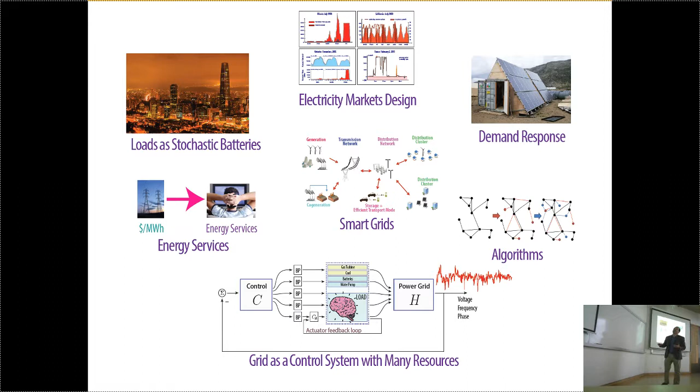I'll give a brief introduction into some of the questions I'd like to speak about today, then a brief overview of robust optimization. There are 107 slides, but I'll probably use like 20, so don't worry—you won't be here until 3 p.m. I'll probably talk until around 12:20 or so.

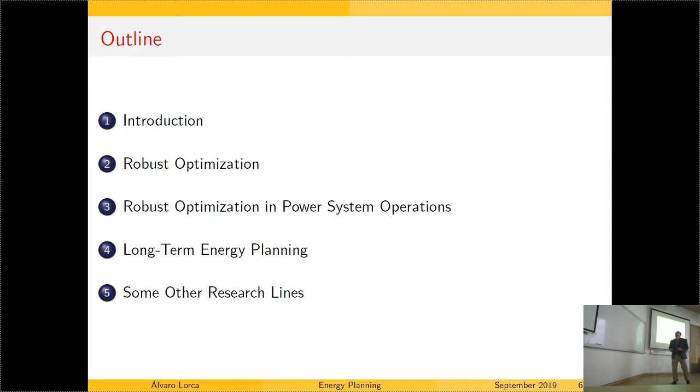Then a little bit on robust optimization in power system operations, energy planning, and if we have time, I'll touch on some other things I'm doing on optimization and energy-related aspects.

The main difficult thing was probably generator contingency—some generator telling you in 10 minutes it'll be out of the system because of some problem, or it disconnects right now because of some issue. Right now we had Argentina having a blackout last year because of some issues in some transmission lines, and that's really hard to manage today as well.

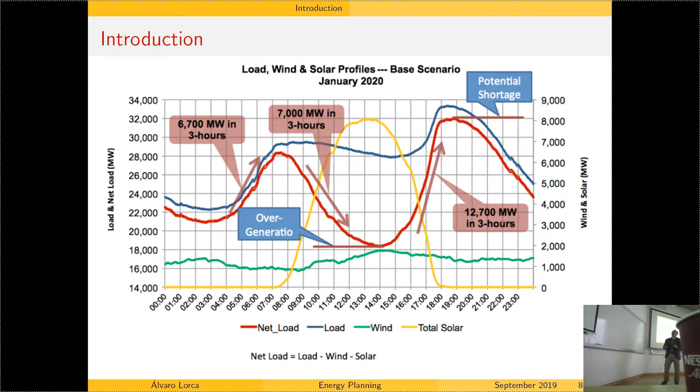But what's making things a lot harder is solar power and wind power. Solar isn't that variable—if you have huge clouds, you might get some strange spikes up or down. But wind is very variable. If you start increasing this signal, it becomes very, very variable, so you're adding a lot more variability into the system. How do we handle this, and how do we change our operational and planning means to have reliable and sustainable energy systems?

That's the question—so I'll be talking about optimization under uncertainty. First of all, you cannot rely only on forecasts. You need to understand how uncertainty somehow merges with your decisions, and we need efficient computational methods to handle high-dimensional uncertainty.

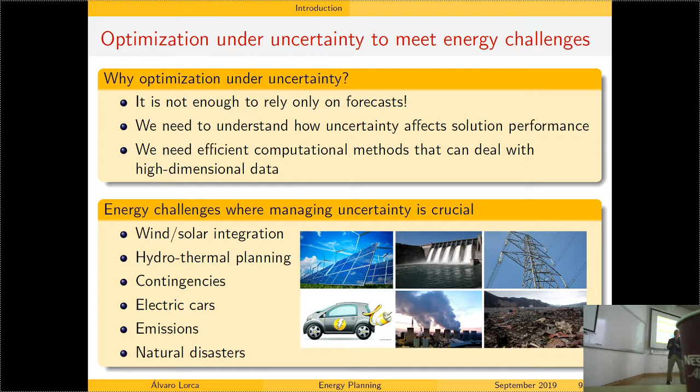So that's some of the challenges, and here are some of the critical points. Okay, I'll just keep to this part.

So what is robust optimization? For those of you that don't know it—I know most of you might know what this is—we'll go over it very quickly.

So what is a typical optimization problem? I have some function that I want to minimize, some constraints. Now the question becomes, what if I have some random parameters, some d vector? This d vector will affect both my constraints and my objective.

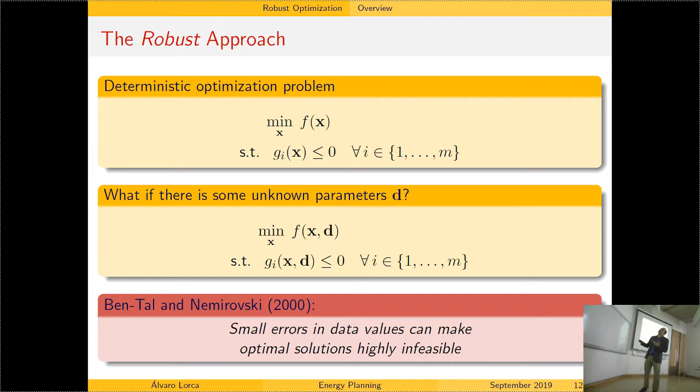Ben-Tal and Nemirovski, almost 20 years ago, told us in this seminal paper that small errors in data values can make optimal solutions—optimal assuming you knew some forecast—highly infeasible, or very far from the feasible space, if this D ended up being something different than what you expected. So how do we find solutions that are immunized against these different possible Ds? That's the main question robust optimization asks.

So we have a very simple example here: two cities, one transmission line, generator A, generator B, demand A, demand B. This generator is cheap, this generator is expensive. I want to supply most of this demand using generator A, but this line has some congestion. This is a very simplified version of the model.

You minimize 10 PA plus 20 PB, with some constraints over both generators and a constraint over the transmission line. Let's say you want at least as much power generated as demand. If we have 100 megawatts of demand here and 100 megawatts of demand here, the optimal solution is producing 130 here and 70 here. It makes sense because you're producing as much as you can here, given that you satisfy the transmission line constraint.

But what if I tell you dA and dB are really in some interval, and that's all you know? dA will be between 80 and 120 megawatts, dB between 80 and 120 megawatts. What would be a good solution now? If I give you this solution, it quickly becomes infeasible if dB becomes 101, for example, or if dA becomes 101.

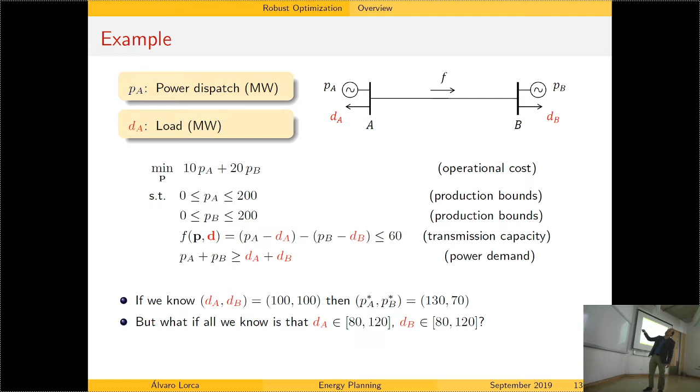So, for example, this other solution—generating 120 here and 120 here—is what we call a robust solution. This will be a feasible solution for any dA in this interval and dB in this interval. You can check all the different alternatives, and you see this solution is feasible under all those circumstances, whereas the original solution quickly becomes infeasible if you vary these numbers a little from 100. This one is more stable in a way.

So the question is, first, let's go back to this huge system. The power system is a really complicated machine—there's a lot of uncertainty, and I want reliable control for it. So how can I find a reliable way to control this large power system? That's the main question.

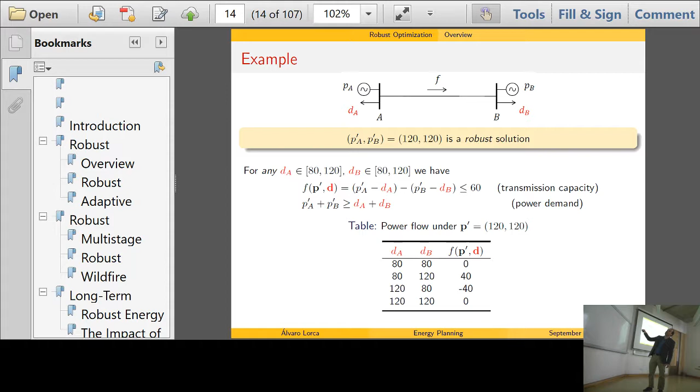Sure, it's much more expensive, but you can check—for example, then you raise the question: what would be the cheapest solution that is reliable under any possible circumstance? At least that one is. Then again, you can generate 140 at each place to make sure you have enough energy, but that's more expensive than this one. So yes, there's a trade-off between reliability and economic effectiveness in a way.

But then you can ask, in a systematic way: what is the best economic solution that satisfies certain reliability criteria? So the traditional, or simplest, robust optimization problem in general is this one: you want to choose some decision such that the worst-case cost is minimized under some D in this uncertainty set, which we call D. These constraints should be feasible for any D in D.

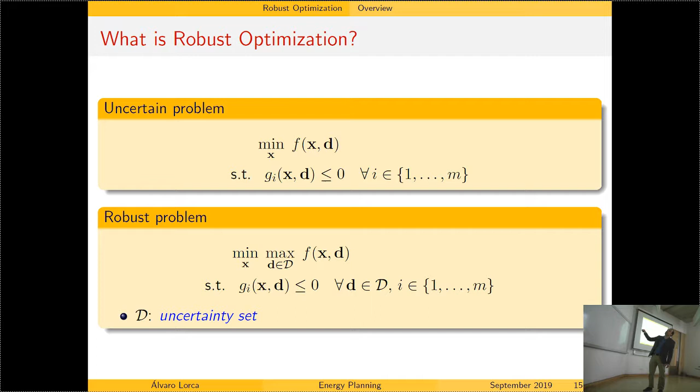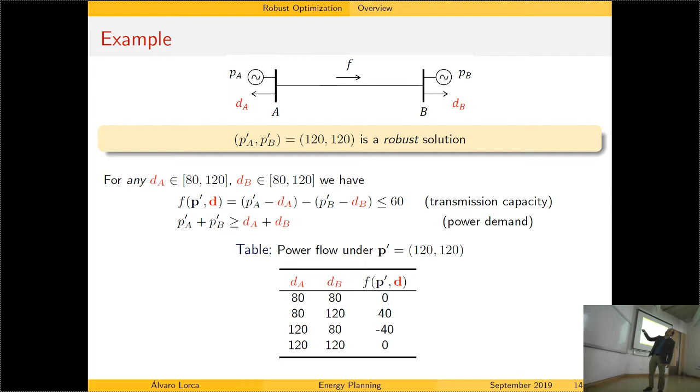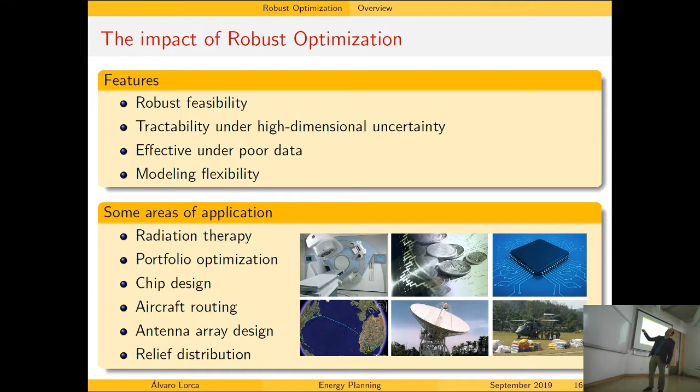Now this D set doesn't have to be a box or two intervals like this one. It becomes a huge question if you have, say, 1,000-dimensional uncertainty—1,000 Ds—what would be a reasonable set? Probably a box or interval for each DI is not a good idea. There's a lot of reasons for doing robust optimization, and you find it studied and employed in many different areas. So I just want to touch on one key methodological idea—that's exactly the question.

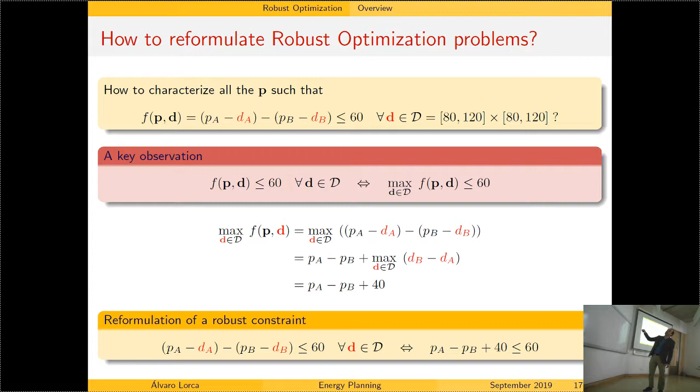How do we find the best solution such that this transmission constraint I showed you before holds? You can write this general robust constraint exactly as this: in the worst case for this vector D, I want this to be less than or equal to some capacity of this line or whatever system it is. In this case, it becomes simple to analyze, but more generally, what you're studying is basically this expression here.

If you have some linear relationship between some function of x and your uncertainty D, and your constraint is that you want this c of x transpose D to be less than or equal to some h, for all D in D, this is equivalent to this being less than or equal to h, and by duality, this expression we have here, and we have some very general expression here written using cones. By duality, we can write this in this way, and that means that our original constraint can be written as this equivalent system of equations using the dual cone of this cone here.

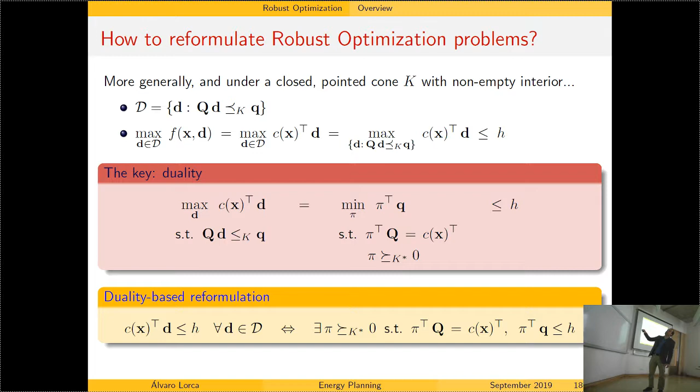So in the linear case, you can just get rid of this k, just have greater or equal to here, but then you can also have SOCP or SDP here. So this is the duality-based reformulation of robust optimization constraints, of robust constraints. We can do a lot of different things.

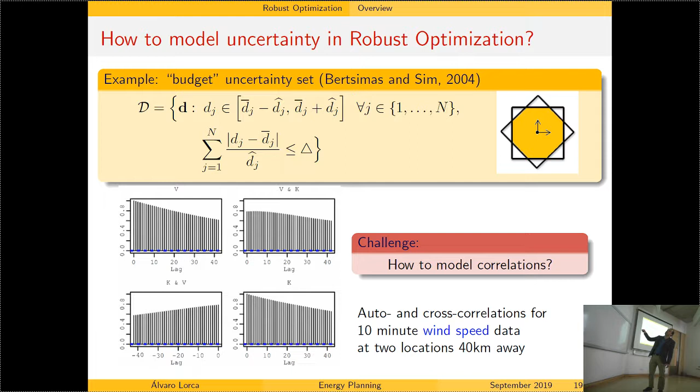The question is, how do we build this set? We can actually also model correlations into these sets. I'll show you in a bit how. Another important aspect is when I have adaptive decisions.

What if I have to make this X decision now, and then I'll observe these Ds that appear over time, D1, D2, and every time I observe these Ds, every time I make decision P1, I only know D1. I make decision P2, I know D1 and D2. I make decision PT, I know the history of the Ds up to T. So how do we model that?

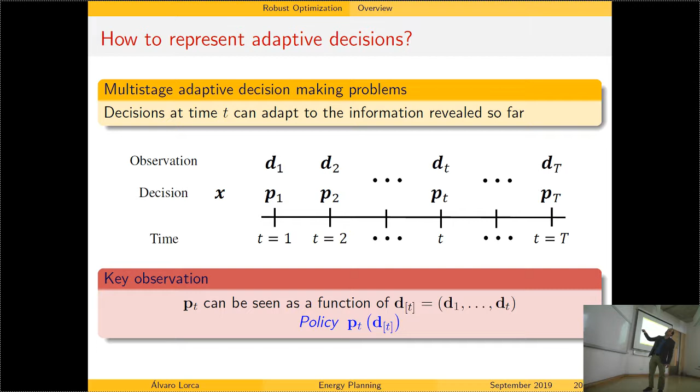Well, the way to model that is we'll think of policies, or functions. So now my decision space is a function. I want this PT to be a function of this information realized up to that point, D bracket T.

And then, for example, we could think of this problem over some time horizon, say 2 time steps, and saying I want some reasonable function. For example, a reasonable function could be: this guy will always supply the demand of city A, and this guy will supply the demand of city B. That's this policy here.

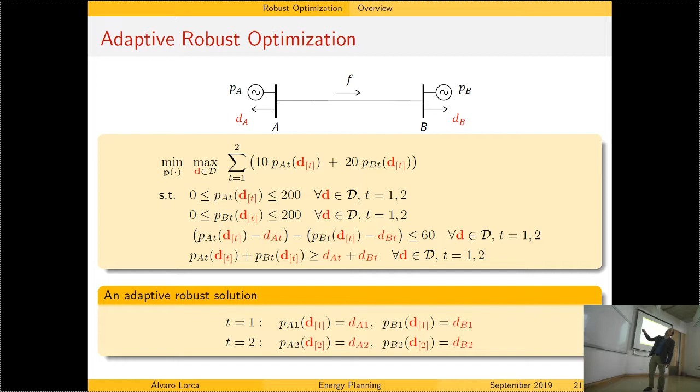And then you can also think of some other things. Maybe this guy will supply half of the total demand, and this guy will supply half of the total demand. That would be another policy. And if that was linear policies, I could think of some non-linear expression as well, so it becomes a hard question. I'll show you at least one case where that ends up appearing.

Why? Because if I know there's a lot of wind right now, it's highly expected that there will be a lot of wind in 10 minutes. But I don't know if that tells me anything about 8 hours from now. So that's a temporal correlation. And also a spatial correlation: if there's a lot of wind right here, there might be a lot of wind 5 kilometers from here, but maybe not 4,000 miles from here.

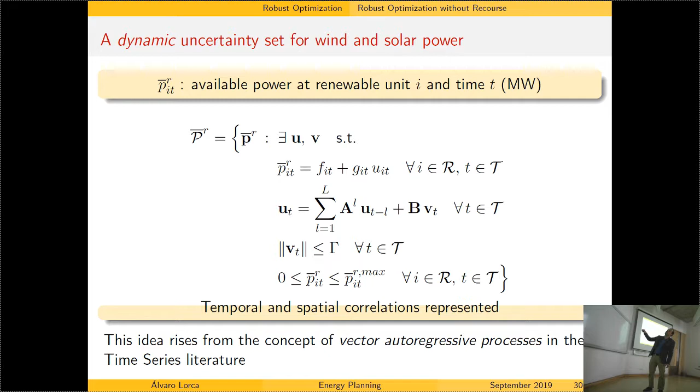Okay, so another methodological concept. This is a classical model in robust optimization: the min-max-min model. The idea is this: you make some decision, similar to what I showed before but just two stages. You make a decision, you have some cost associated to it, and then uncertainty or nature, if you will, plays some worst case move within some set. This is like this Xi set. After nature does this, I can make some additional decisions, some second stage or adaptive decisions, that depend on my first stage decisions and on what nature did.

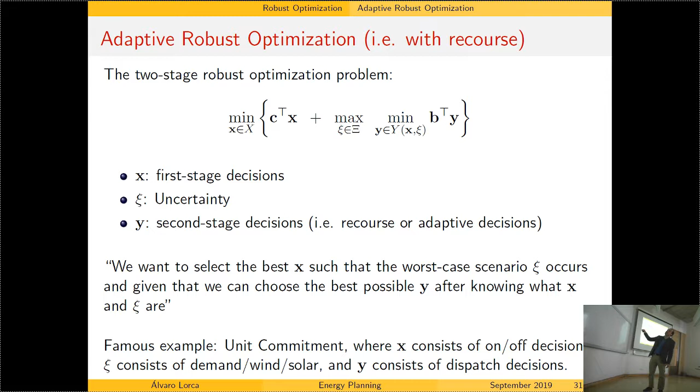So a famous application of this model, and there's been probably more than 50 papers with this structure only for the unit commitment problem. Unit commitment is which generator should I turn on or off for the next 24 hours. People have worked on many different methods for solving this kind of problem, depending on the structure you have for this Y set and for the Xi set. That would be the main thing.

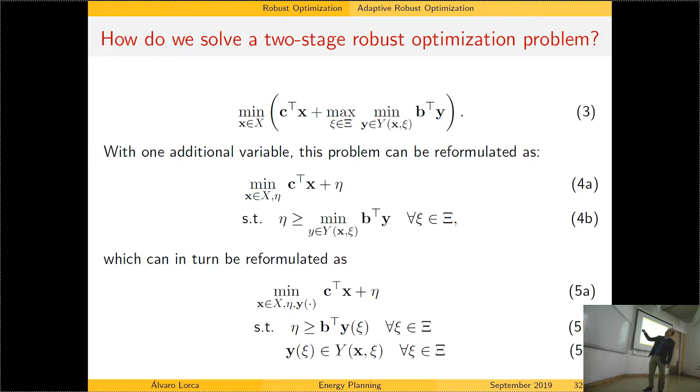So the key idea to formulate and solve this problem: you can reformulate it with this additional variable that represents worst case second stage costs, and then you can write this problem in this semi-infinite way. Thinking of functions of xi, some ideas, at least to get approximate solutions, is some sort of sampling over this space, or systematically finding bad scenarios. That would be the idea, and I don't have time for all the details.

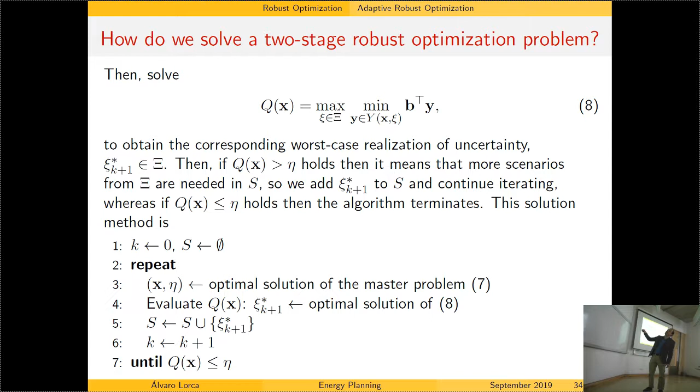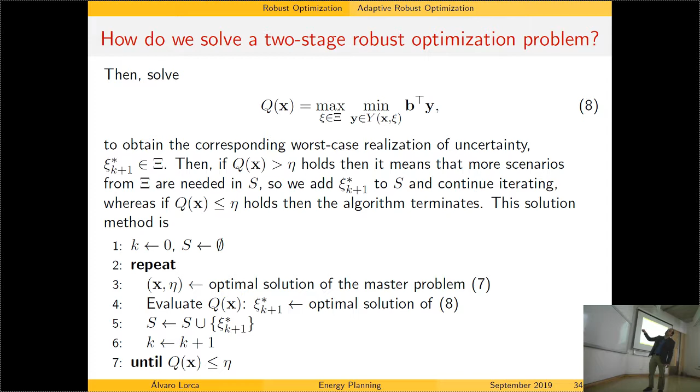The main challenge would be anyways to solve this problem. If this Y is linear, then you can use duality here and obtain a bilinear optimization problem that's still non-convex, but depending on the structure of this set, or some approximations in the dual of this space, then you can find some reasonable approximating mixed integer optimization problem. And we've used those techniques.

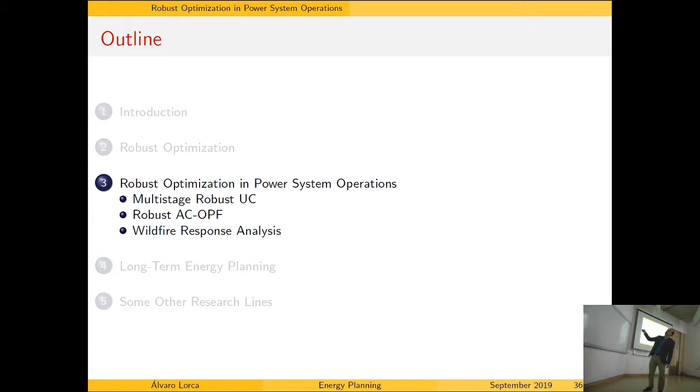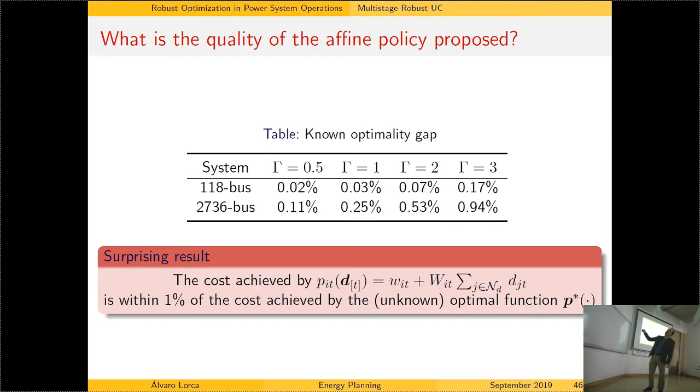I just want to show you that even for a very large system, we ended up showing that this gamma, which represents how large your uncertainty set is, gives a result that's 1% away from optimal. How do we know it's 1% from optimal, with no ideal optimal function? Our lower bound here, we ended up comparing to an information relaxation of this problem.

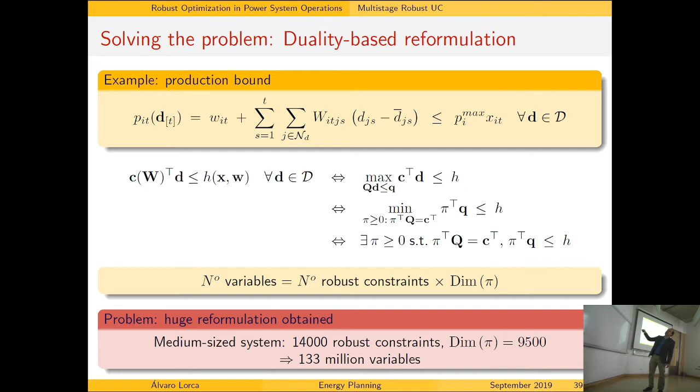The relaxation is basically: what is this piece—this P at time 1 knows all the D vector, P at time 2 knows all the D vector—and I forget about non-anticipativity. That's the idea. We used that and we were able to see that the policy is not too bad in practice. It's kind of surprising that the policy has such a very simple form.

Yeah, super simple. It doesn't involve the ramp bounds, because we think that if the difference is too large, we violate the bounds. Exactly, that's one of the constraining aspects.

So for example, if there's a generator, what you end up having is, depending on your uncertainty set, you might know that it will move, I'm inventing numbers here, between 150 and 200. So your forecast is 175, this is the nominal generation of your generator. But depending on this sensitivity variable I showed you, it could go up to 200 or 150.

But then maybe in the next hour, this guy will move here, right? So 190, and maybe 180 and 200, I'm just inventing the numbers. So you need this to be feasible. So not all generators will be able to do that.

And what you end up seeing is this will immediately tell you what generator - this will employ the flexibility from those flexible generators. And some generators are able to do that from one hour to the next, and some are definitely not. So you want this sensitivity to be reasonable with respect to what you can do on these ramp constraints, which are here.

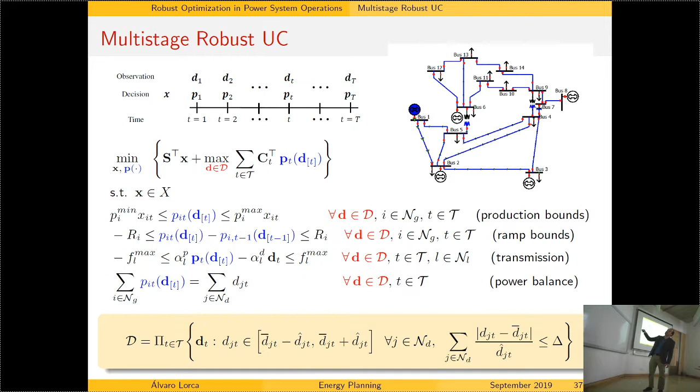I don't need to, I just build it. One of the benefits of this policy is that you put this into that ramp constraint I showed you, and immediately you can observe that you can pre-compute those constraints and add explicit constraints that tell this generator, okay, if you want to choose this 200 and choose the 150, you have to be able to do this.

It will be embedded into the W, into the space for the two W's for your decisions. Exactly, yeah, that was one of the benefits of this.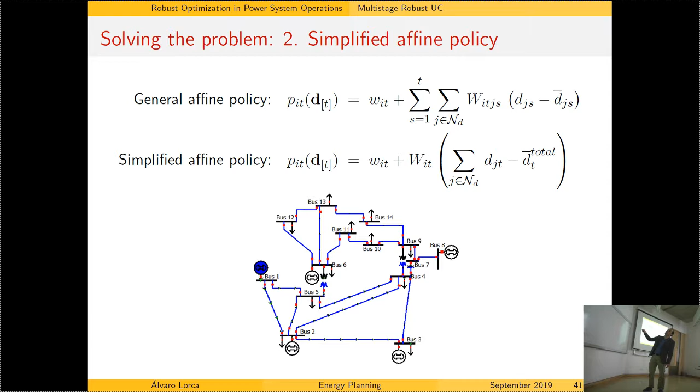Okay, so that's why I wanted to tell you about this part. Now I want to talk about a little bit more of convex optimization. Okay, so let's go back into that. Okay, so these are the bread and butter of electrical engineers over there.

These are Kirchhoff's laws of current. This is current balance, okay, this is balance of current. This is Ohm's law, how current relates to some physical components at every node of the network to voltages.

Okay, and then you have AC power. This includes the concept of active and reactive power, and these are really complex numbers that represent some sinusoidal signals in some perturbed space, in the phasor space. So this is balance of power in the network, and then based on that, you can write the power flow equation. So what I did is just replace all these numbers by some representation of these complex numbers.

So here we have the real part and the imaginary part of those equations. Okay, so this is called active power and reactive power. This is injection from generators and demand from demand nodes.

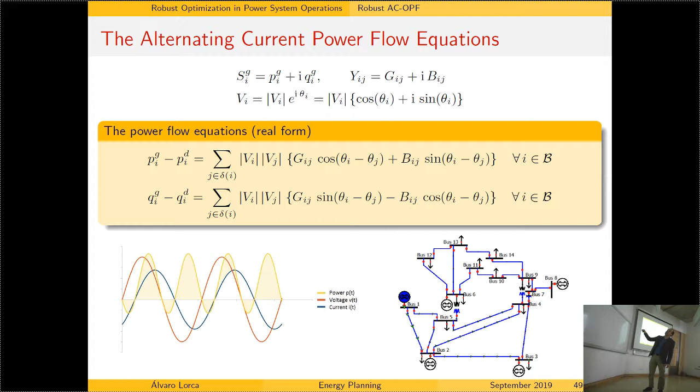So based on this, I don't want to go over details, but based on this, you can write the ACOPF problem - alternating current optimal power flow problem. So I want to choose some active level from my generators, reactive level from my generators, voltage level at all nodes, and I want this to be satisfied. And this is angle level at all nodes - the angle represents the shift in your signal with respect to some reference. Okay, so this is a traditional thing, it has been written for maybe 100 years, or at least decades.

But then Santanu, Diego's advisor here, and my advisor as well, and Burak was here a couple of weeks ago, right, Burak - okay, so Burak is a genius. So they worked on this thing, and they basically said, okay, we can equivalently write this problem in this form. Using the C and S variables, we represent these cosines and sines, and some trigonometric things, and you can always recover from this problem these voltages. So these problems are equivalent.

But then what they said is, okay, we can get rid of this constraint and relax this constraint here, and what we obtain is an SOCP problem - second order cone programming problem. And this is a convex optimization problem that we can efficiently solve, and this can give us a very good bound for this original true problem, which is the true physics of the power system.

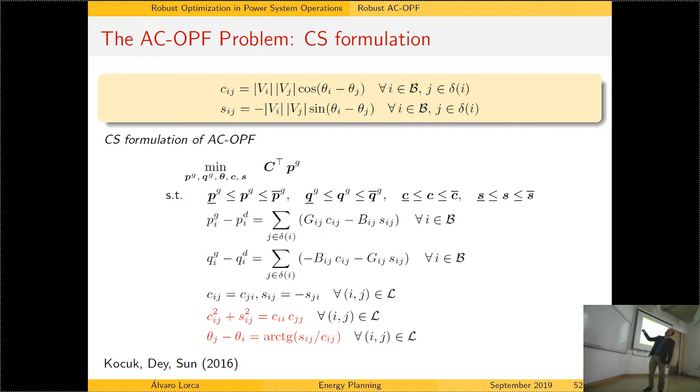So how do we, okay, one other concept some other people realized is that you can also write this problem in this way. This is another equivalent way to write the ACOPF problem, but this is non-convex quadratic. We have these quadratic terms, xi times xj, or ei times ej, fi, fj, etc.

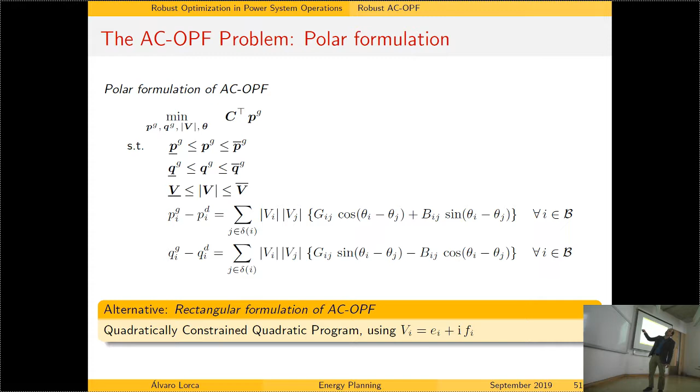This is quadratic non-convex, but then we can do SDP relaxation for this problem, and again this is a convex problem. These people studied this problem extensively. So we have a suite of ACOPF problem approaches. We also have traditional linear models approximating this problem, and I'm not showing them to you. SOCP relaxation of ACOPF and SDP relaxation of ACOPF.

Okay, so now let's jump into the real-time operation of the system. I'm operating the system in real time. Let's say this time is 10 minutes, 10 minutes, 10 minutes, so this might be 1 hour, or something like that.

So I want to choose all the time how I'm running the system, and then I have these ramp constraints we discussed before. So I want this solution to be reasonable for what comes in the future. But what comes in the future, when I make these decisions here, is really uncertain. I have uncertain active and reactive demand, and uncertain available renewable power from wind farms, solar farms, and so on.

So what we worked on at the end of my PhD with Andy Sun is finding some solution here, writing some max min or worst case situation in these future time periods. Now if this is ACOPF, I don't know that I can say anything about this max min problem. But if this is some reasonable approximation of ACOPF, maybe at least I can get some bad scenarios for the future of the problem.

So what we did is we worked on this part using SOCP, SDP, and some linear approximations of the problem to see what would be a good approximation to try to find good solutions here under the true ACOPF equations, under the true nonlinear non-convex equations. And some of the conclusions here is SOCP is just the best balance.

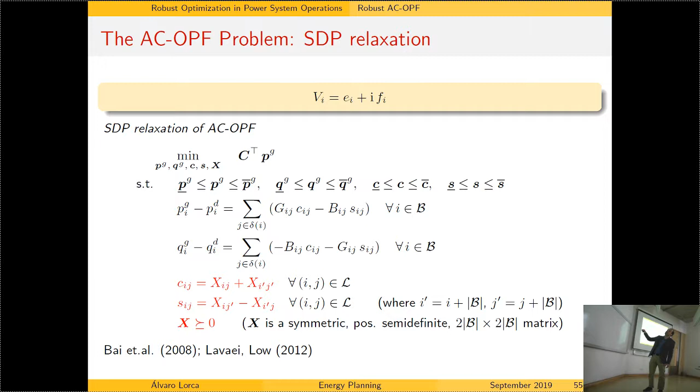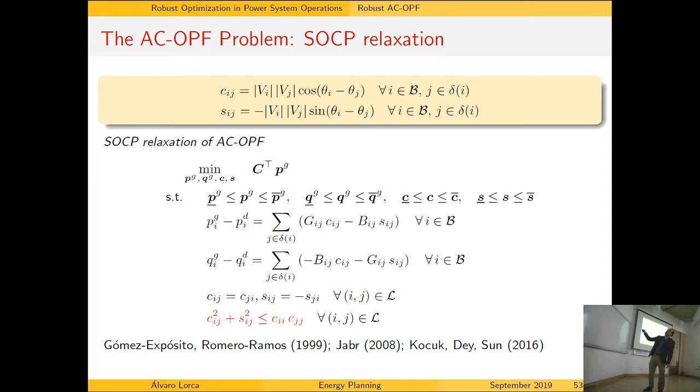This SDP works, but it's too unstable. Using at the time the best SDP solver, which as far as I know was Mosek, it was too unstable. Whereas SOCP strikes the right balance in a way, and gave us really good ways to see into bad outcomes in the future, and deliver us and help us find good solutions here, and run the problem in a smart way.

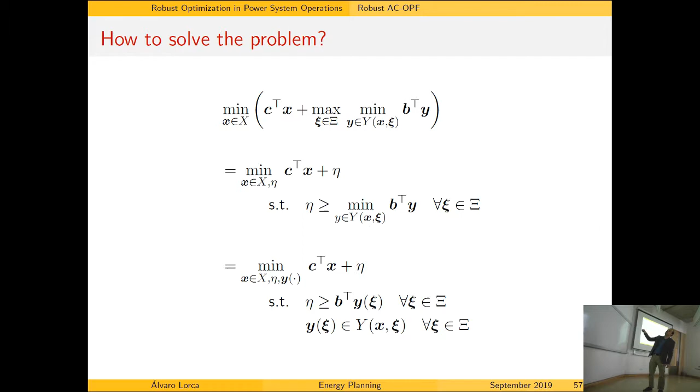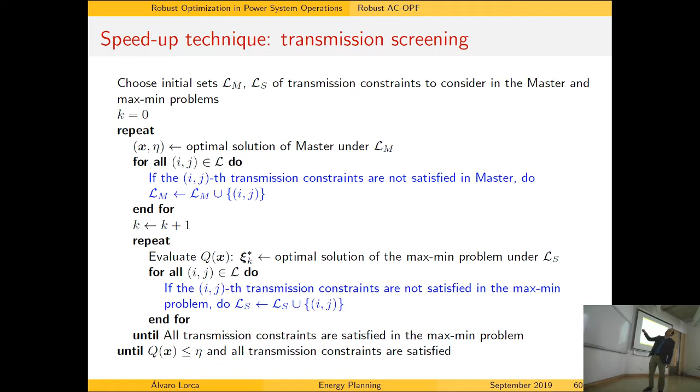So we used a little bit of these ideas I showed you before, but we had to do some approximations. In particular, this max min under some convex model, you can take the dual and you obtain here a biconic problem, because this is a cone. And then we did some heuristics to solve this. Unfortunately, we couldn't do a lot more than that.

There's not much guaranteed under some super simplistic circumstances, but in practice, in a lot of different cases, it reaches something like 3 to 5%. Sometimes you get 0.1% far from optimal. In the worst case, I've seen up to 10%, but that's strange, away from the optimal value.

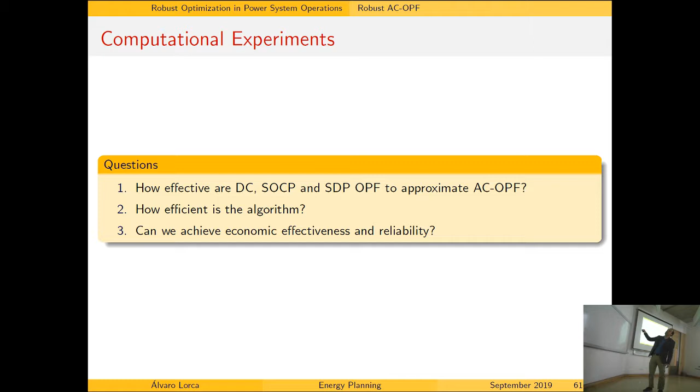So in a lot of cases, these SOCPs, with some additional work into it, because I showed this arctangent constraint—for example, in that paper, they do some approximation of this function from outside, and they manage to reduce the gap and so on. So 10% is too much. I mean, it's usually 3%, 1%. It's really tight.

There's some super special circumstances, but you have to ignore a lot of the true aspects of the problem to find some guarantees. And also for the SDP, it's a similar thing. Okay, so I just wanted to give you the idea there.

Something we're doing is using robust optimization to study how the power system should react to wildfires. In 2017, we had the worst January recorded in terms of wildfires in Chile, and it did affect the power system. So what the system operators ended up doing is islanding the north part from the south part, close to Concepcion, separating the Chilean power system into two parts.

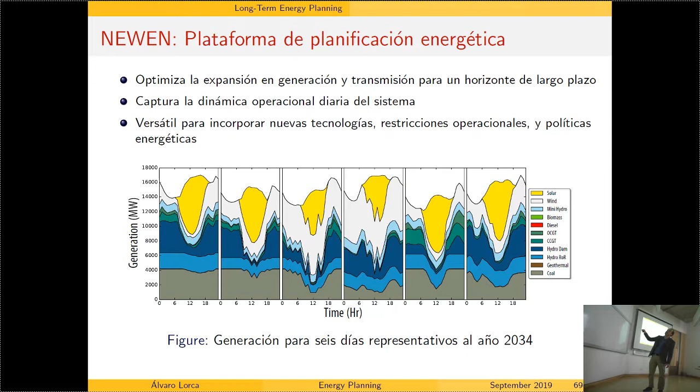Okay, I'm running out of time, so I want to skip this part and just show you the kind of analysis you can do. So desalination—in the north of Chile, there's a lot of mining companies desalinating a lot of water, taking salt out of water. There's about a gigawatt of demand only from desalination infrastructure.

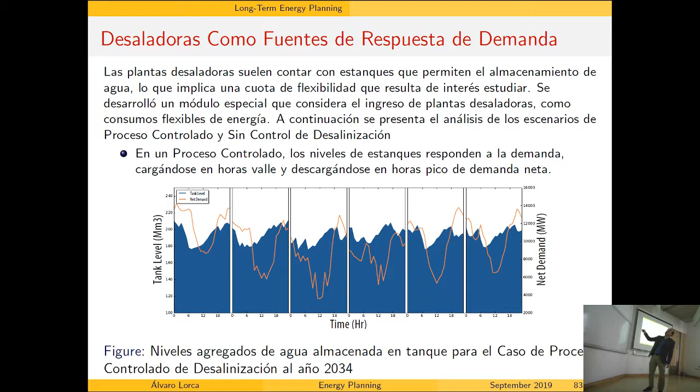This becomes a really interesting problem: what if I could control those desalinating plants in a smart way, to use more power and desalinate more when I have more solar power, or more wind power? This shows a bit of different dynamics under controllable and uncontrollable desalinating machines in the north of Chile.

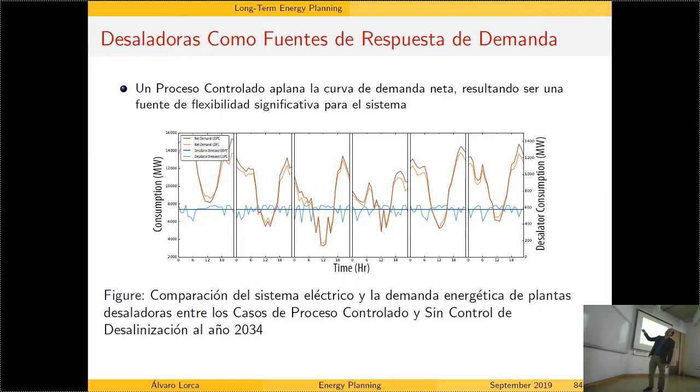The main insight was this: in 2034, we expect to have about 40% wind and solar power. But if in 2034 you're able to use these desalination plants from the north in a smart way, you'll jump from 40 to 45% wind and solar power. That's 5% more variable renewable energy, cheap and sustainable, only based on being able to control these desalinating plants. This is work in progress, and we're trying to see how to employ these energy planning models to see if there should be more considerable efforts to control desalination plants.

So just as an example. Now the other thing I want to show you is, again, back to this robust model: first stage, second stage. How we employ this structure in an energy planning problem, this is a published paper, is we do this. This X represents my investments on generation, transmission, and so on over the power network in the next 20 years.

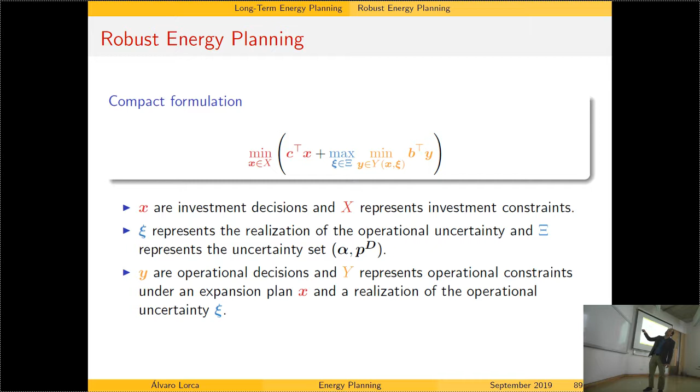This here represents the operational dynamics under some bad day. So this uncertainty set will give me a bad realization for demand, for wind power, and for solar power. What we end up building are robust plans for how the power system should expand in the next 20 years.

So this is again the idea: you have some uncertainty set and you find some bad load. Generation and transmission investments, plus the worst uncertainty realization and operational cost. This is the min-max-min structure.

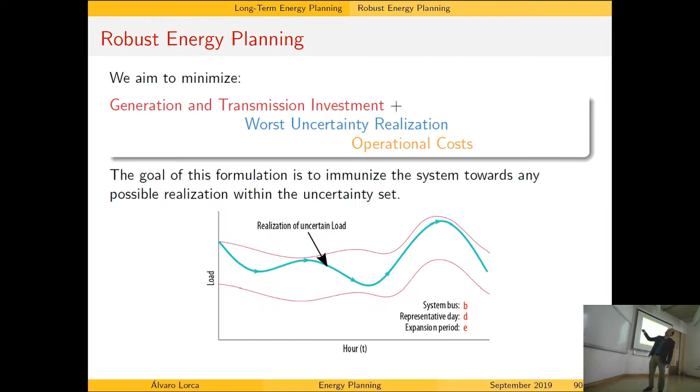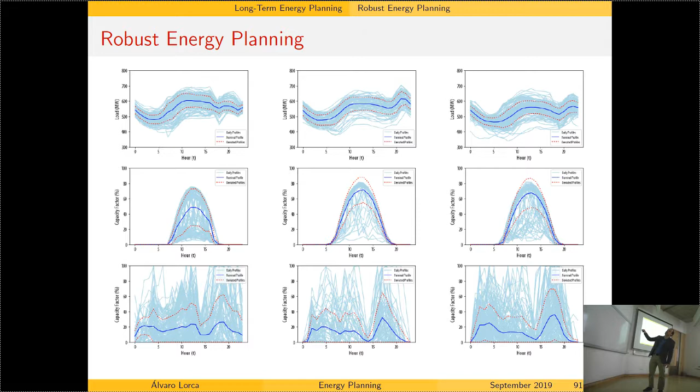Again, the concept of clustering: these are 365 days of data clustered into three different clusters, which we use to build these representative days. Now the point is building some uncertainty set over these different clusters. So we did clustering and built uncertainty sets over demand, solar, and wind over the whole Chilean power system.

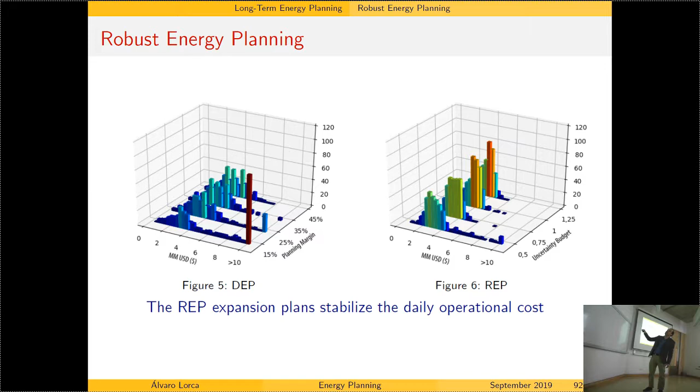We end up showing that you can really control well, using this robust model, the uncertainty in wind and solar power in this uncertain day of 2040. Okay, and just some ending comments.

So we did some studies and observed that under reasonable trajectories for how the costs of this technology will evolve, we expect that Chile will have about a third of its electric energy coming from this type of plant. Which is crazy, but that's what the numbers say — the numbers of these models say, under reasonable circumstances.